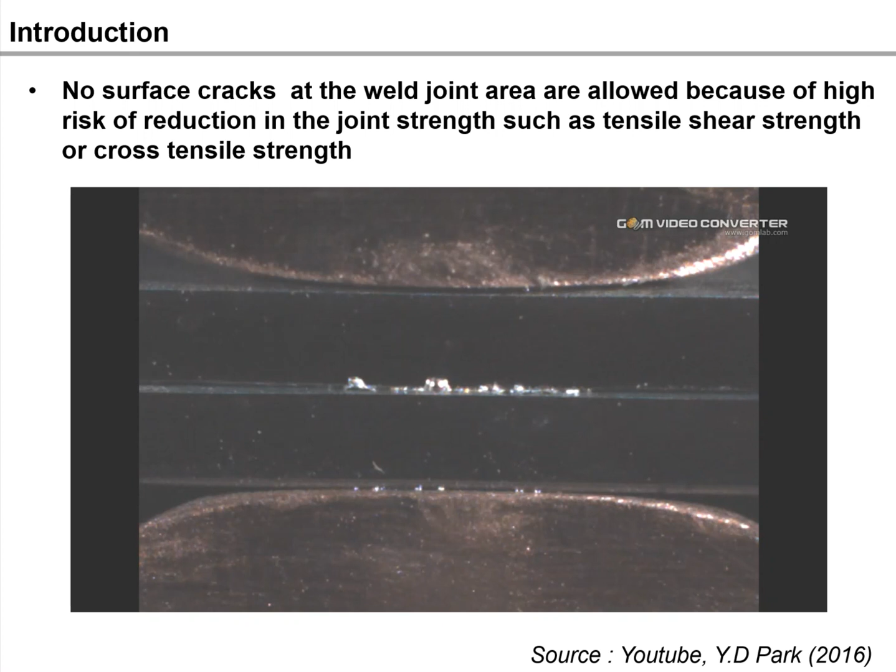My speech today addresses the understanding of LME cracks in resistance spot welding and proposed approaches for liquid metal embrittlement-free welds. No surface cracks at the weld joint area are allowed because of the high risk of reduction in joint strengths, such as tensile shear strength or cross-tensile strength.

Our research group was able to capture real-time LME cracks using high-speed video cameras in 2016. You can observe the continuous LME crack initiation and growth throughout the entire welding time and holding time.

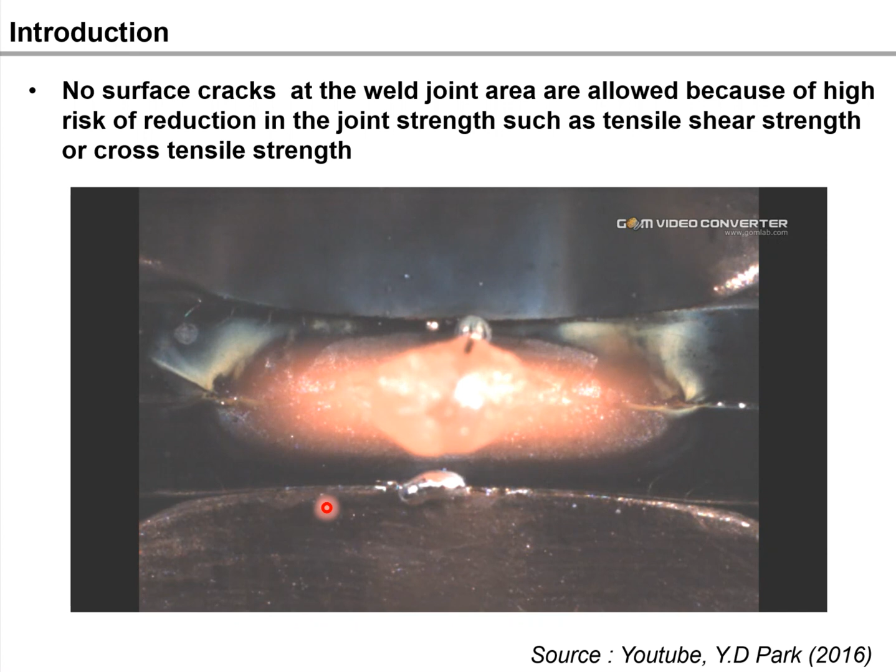Based on the observed LME cracks, the following three factors are the main prerequisites to form LME in steels: first, liquid zinc in contact with the steel; second, overcritical tensile stresses; and third, base metal microstructure. When these three conditions are met at the same time, the LME crack will occur.

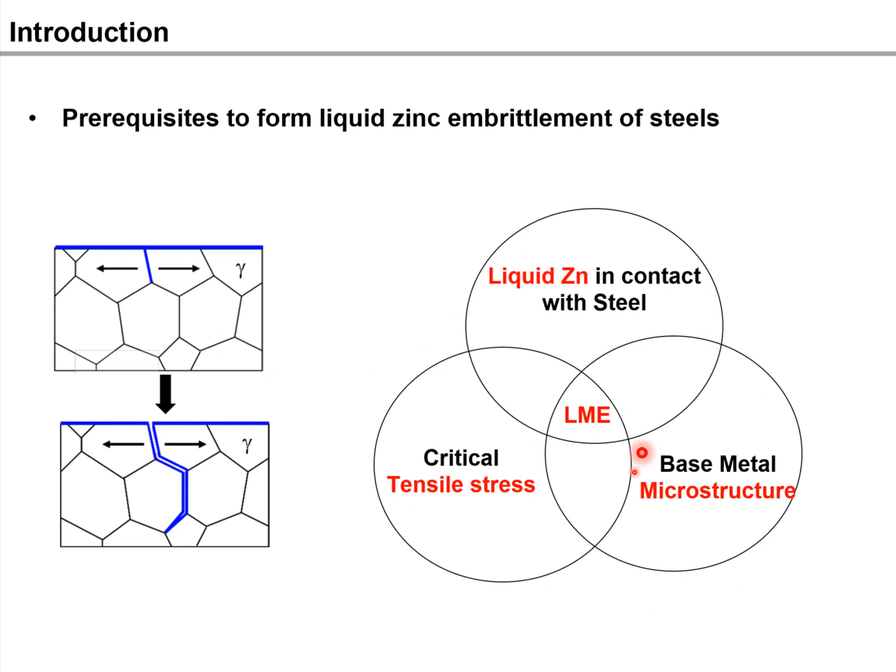Based on these prerequisites - liquid zinc, base metal microstructure, and tensile stresses - for a better understanding of liquid metal embrittlement cracks, I will explain the effect of zinc coating on LME cracks, secondly the effect of base metal microstructure on LME cracks, and lastly the effect of resistance spot welding process on LME cracks.

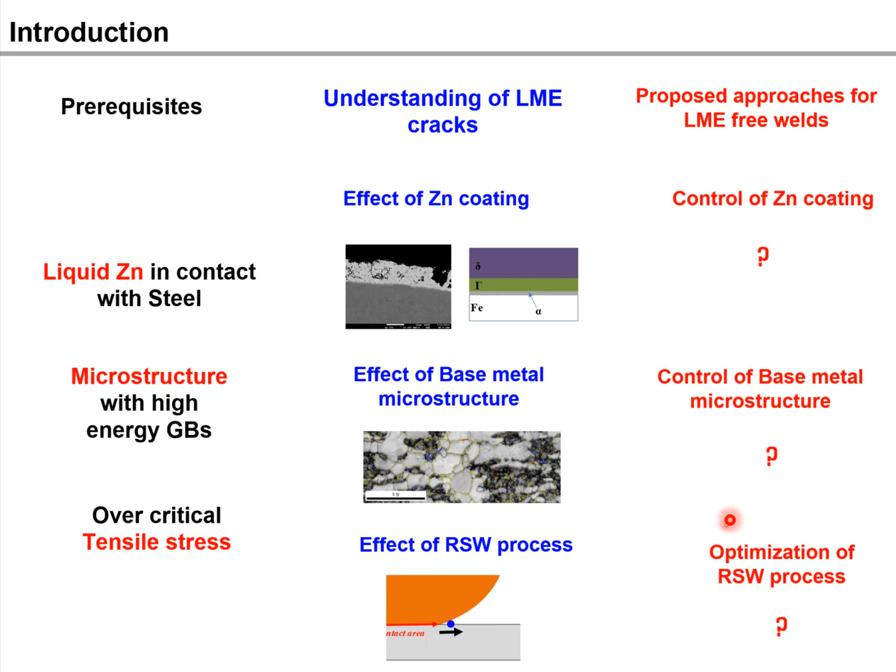After that, I will propose feasible approaches for LME-free welds: first, control of zinc coating; second, control of base metal microstructure; and lastly, optimization of resistance spot welding processes.

In part 1, let's make a deeper understanding of LME cracks. Firstly, the effect of zinc coating on LME cracks.

In 2015, we made an investigation for the effect of different coating types on LME cracks. We made resistance spot welds with increasing current, which results in increased nugget diameter. Then we compared the maximum LME crack lengths at the same nugget diameter. The result shows GI coating is most susceptible, then GA coating, and lastly EG coating.

Hong et al. also found that silicon in the steel delayed the dissolution of iron into the coating from the steel, which suppressed active formation of the alpha-Fe zinc layer. This could not prevent the steel from contacting liquid zinc during welding. So there is an underlying mechanism of the effect of zinc coating microstructure on LME crack occurrence.

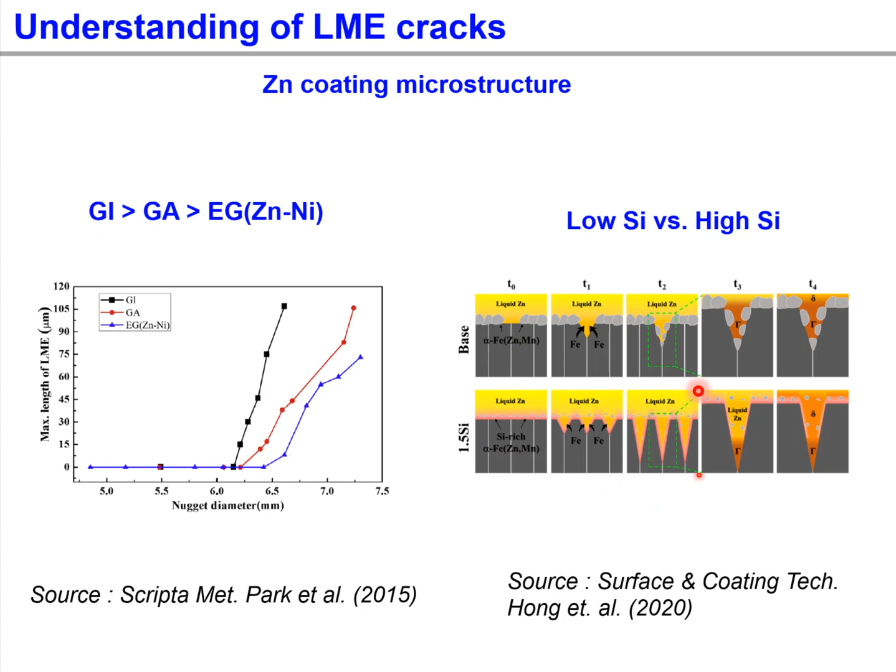To understand the underlying mechanism of zinc coating microstructure, Gleeble tests at different temperatures starting from 700 to 900 degrees Celsius with different holding times have been done to correlate zinc coating microstructure and LME behavior. The specific temperature and holding time combination shows more proneness to LME cracks than others.

The graph shows the stress and strain curve at testing temperature of 800 degrees Celsius. A large reduction in strain with the GA-coated sample compared to bare steel was observed due to LME. This reduction in strain due to LME is called the LME onset strain. The smaller the LME onset strain value, the more sensitive the material is to liquid metal embrittlement.

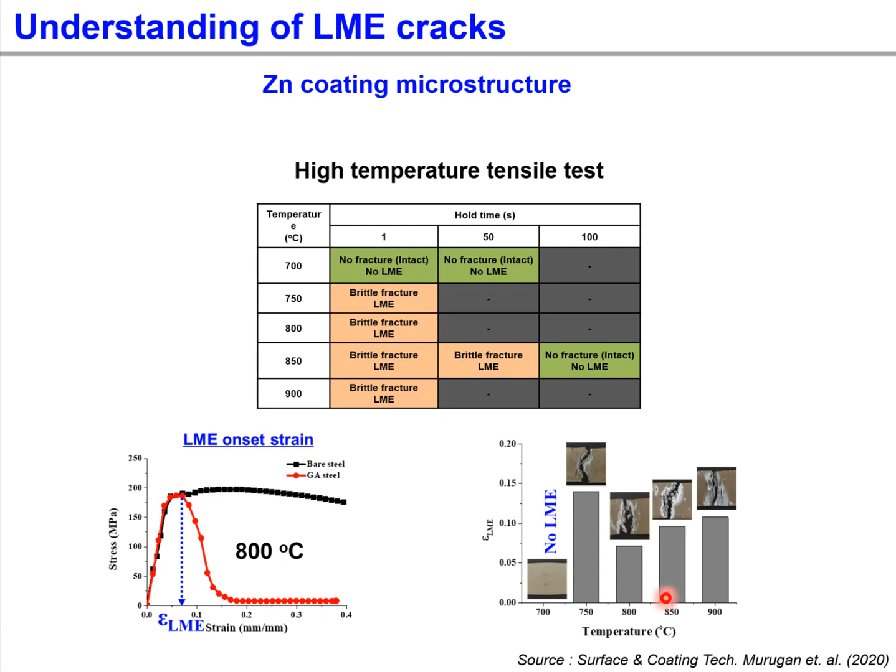We display the epsilon LME values at different testing temperatures. The largest reduction in strain was observed at 800 degrees Celsius, and a logical explanation is required for better understanding. We tried to explain the LME sensitivity with zinc coating microstructure analysis using SEM-BSE mode by analyzing

the ex-situ phase constituents such as delta, gamma, and alpha. We can predict the in-situ phase constituent and phase fraction at each testing temperature.

At testing temperature of 700 degrees Celsius, less than 3% of liquid zinc was available, so there was no LME cracking. However, with increasing testing temperature, a large increase in liquid zinc fraction was observed, and 58% of the phase was liquid zinc at testing temperature of 800 degrees Celsius.

When we make a relationship between the fraction of liquid zinc and the LME onset strain, increased LME sensitivity was found with larger fraction of liquid zinc. So the largest reduction in strain at 800 degrees Celsius can be explained by the high fraction of liquid zinc

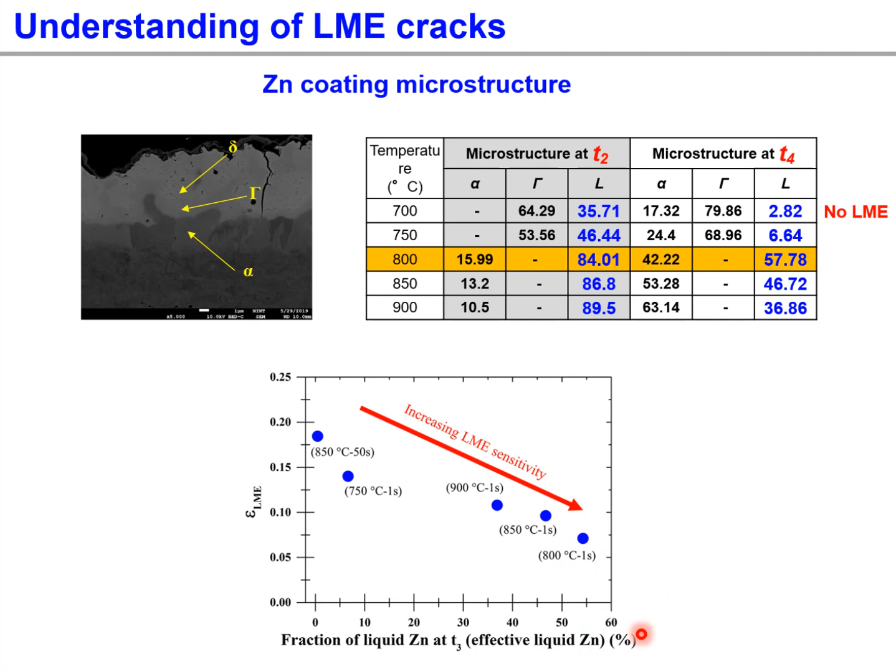for LME cracks. In more detail, at 700 degrees Celsius with a short hold time, only 3% of the liquid was available, but not in contact with the substrate, which resulted in no LME cracks. At 750 degrees Celsius, about 7% of liquid zinc was available from the entire coating layer, and it made contact to the substrate still through the alpha-Fe zinc layer, ending up with LME cracks.

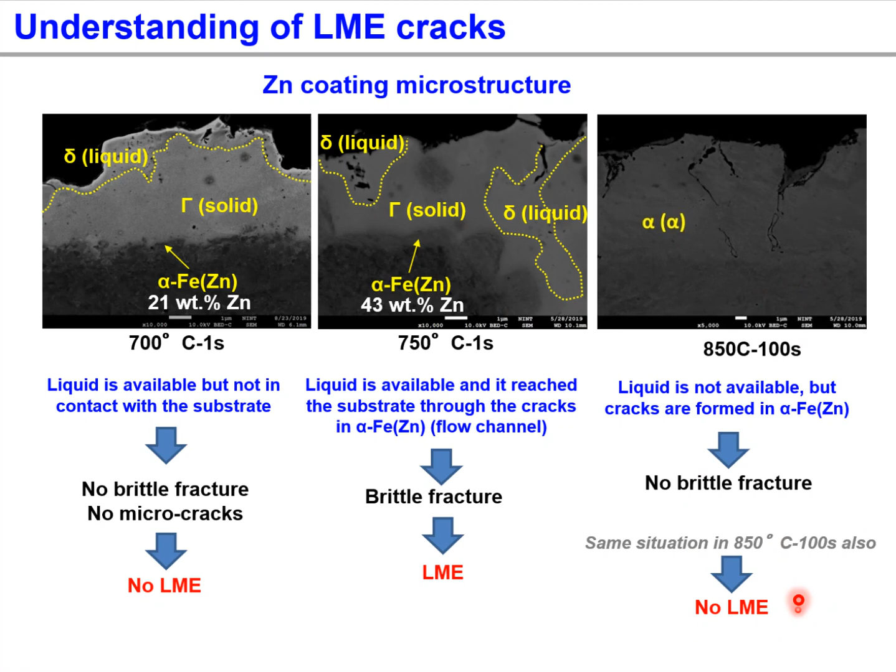However, at 850 degrees Celsius with a hold time of 100 seconds, a thick and continuous alpha-Fe layer was established with less or non-existent liquid zinc. Then there were no LME cracks. Overall, fraction of liquid zinc and continuous layer of alpha-Fe zinc are important factors for the LME cracking mechanism

in zinc coating. We can express this with a water tank analogy. Water level represents the fraction of liquid zinc, and the water tap represents the layer of alpha-Fe zinc, which serves as the flow channel.

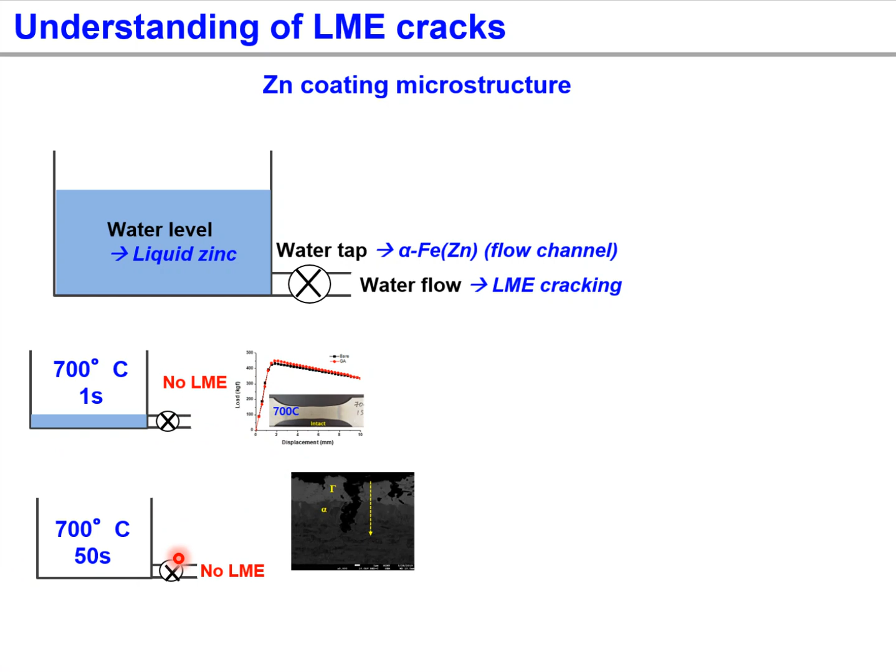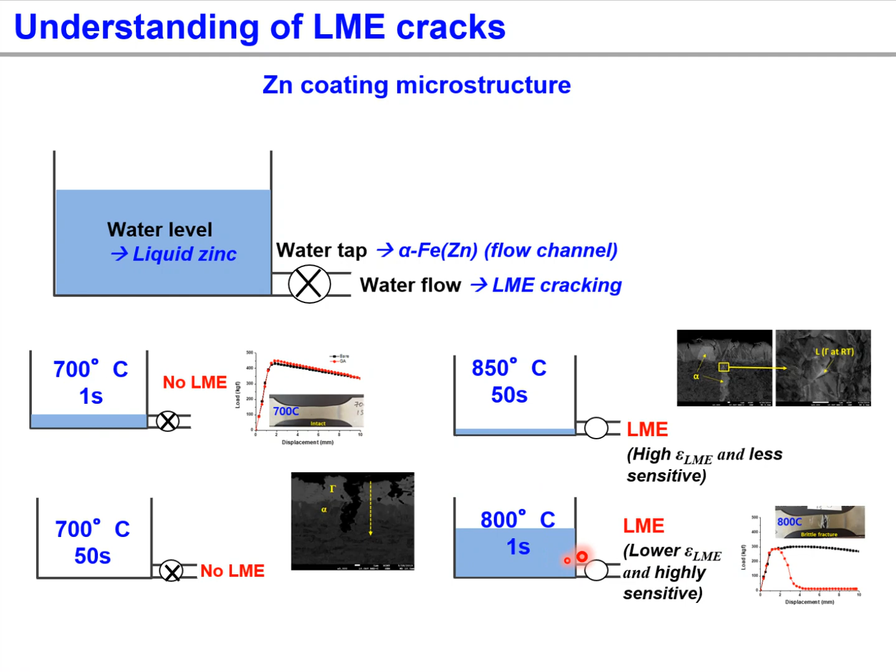At 700 degrees Celsius with 1 second hold time, due to the very low liquid zinc fraction and continuous alpha Fe layer, there is no LME cracks. Same for the 50-second hold time condition. However, at higher temperature of 850 degrees Celsius with the 50-second hold time, both conditions of liquid zinc and breakage of the alpha layer end up with LME cracks. Similarly, the 800 degrees Celsius, 1 second hold time condition provides a large fraction of liquid zinc and continuous alpha Fe zinc layer.

The following is a summary of the effect of zinc coating on LME cracks. The LME sensitivity is governed by the fraction of effective liquid zinc. LME is influenced by the breakage of the alpha Fe zinc layer, which allows direct contact of the liquid zinc with the substrate steel. High silicon in the steel delays the dissolution of iron into the zinc coating, which suspends the formation of the alpha Fe zinc layer, making it more susceptible to LME cracks. So the fraction of liquid zinc and the alpha Fe zinc layer are the key factors from the zinc coating side.

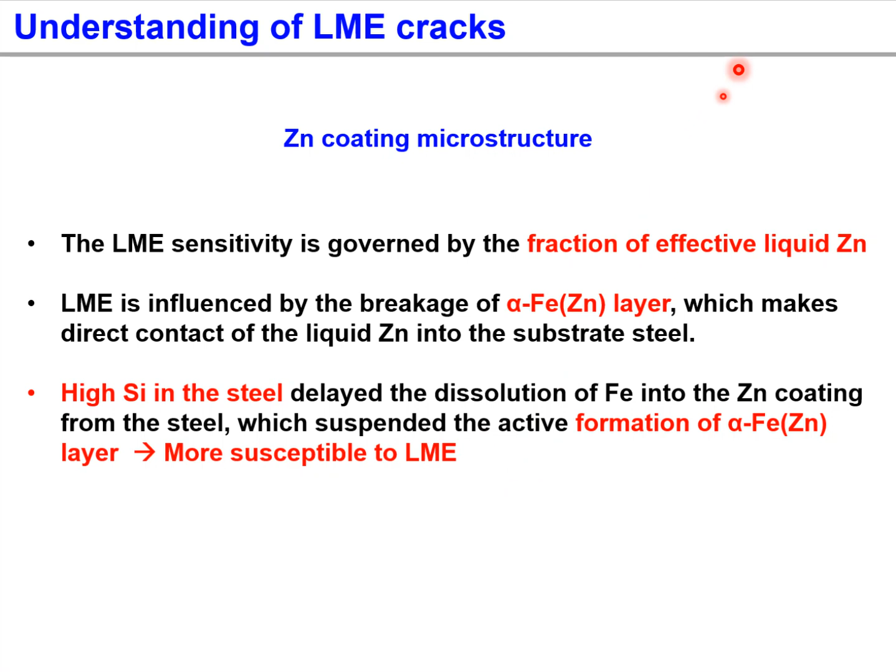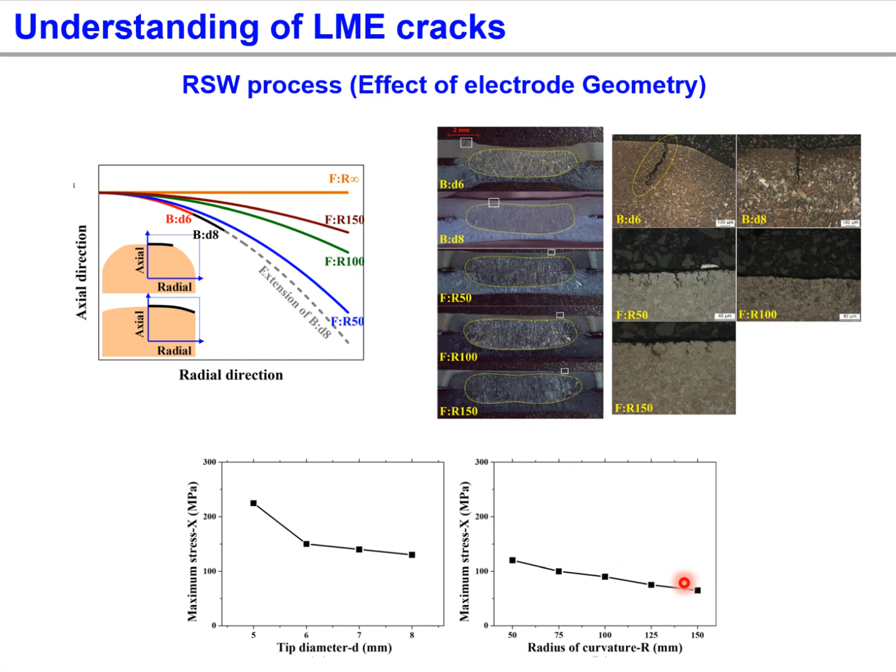Secondly, the effect of resistance spot welding process on LME cracking. As part of the welding process, electrode geometry is well known as a key factor for LME cracks. The results suggest that the radius of the electrode is the most critical design parameter controlling the critical stress for LME cracking. Moreover, larger tip diameter and higher radius of curvature result in lower maximum stress levels, leading to lower LME sensitivity. This is attributed to the fact that the radius-type electrode provides the benefit of increasing both the radius and the electrode tip diameter.

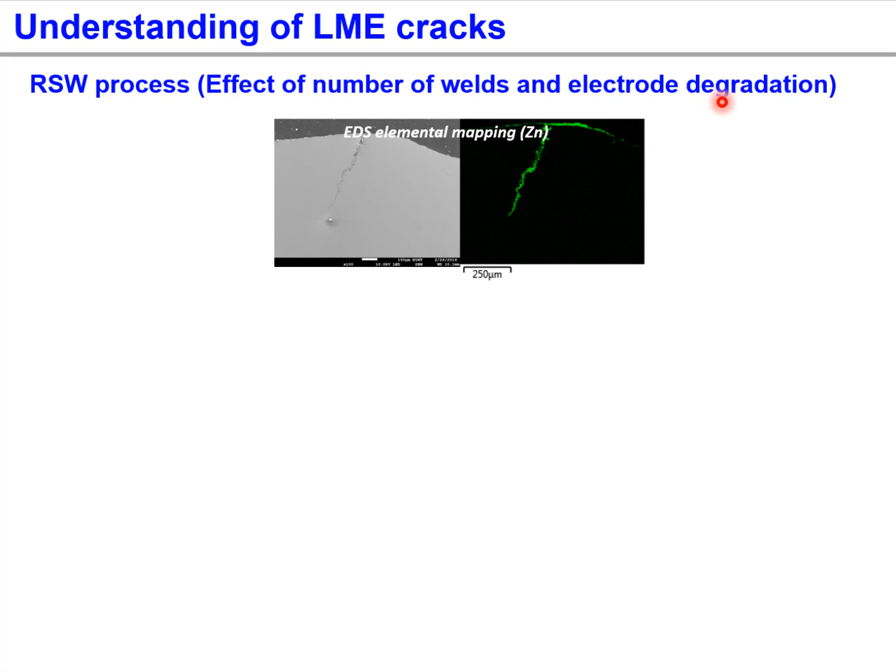We also investigated the effect of number of welds and electrode degradation on LME cracking. When the first weld was made with a high current level, it resulted in large LME cracking. With an increase in weld number, there was a dramatic reduction in total crack length and maximum crack length up to around 160 welds, and further welds showed relatively low levels of LME cracks.

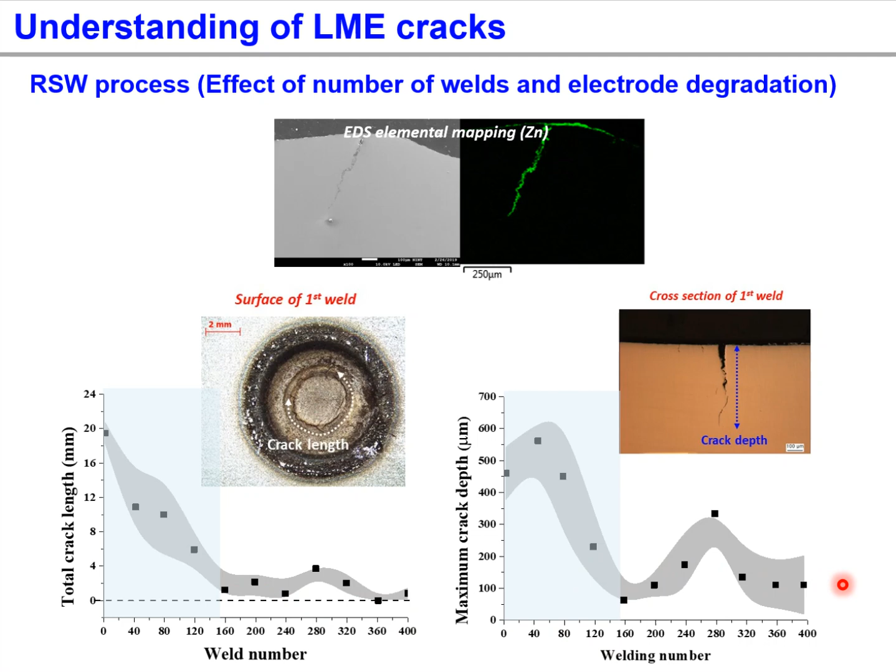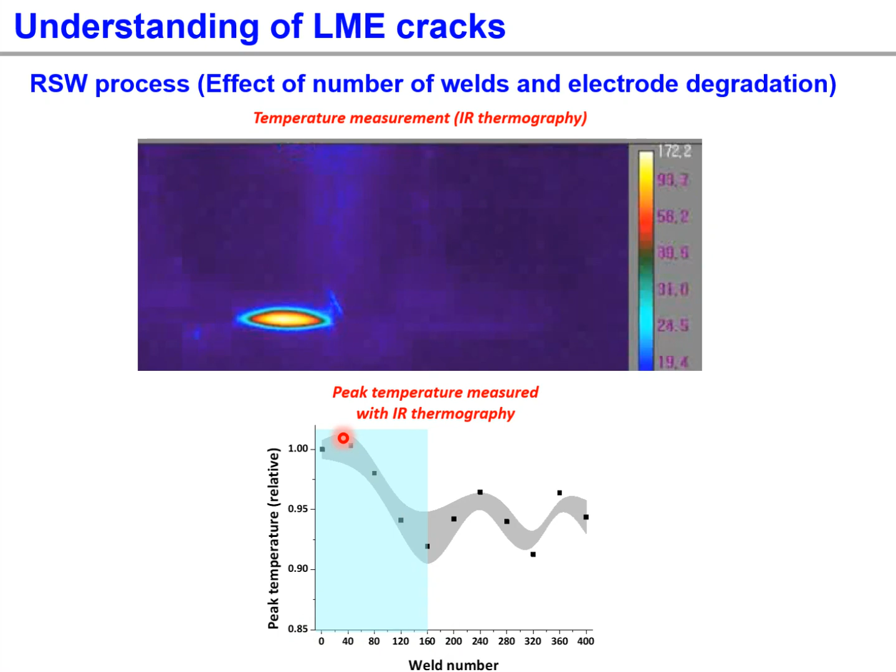Since surface temperature is known to be directly related to LME cracking behavior, peak temperature was measured with IR thermography and recorded at each weld. The surface peak temperature also shows a large drop until 160 welds and remains at a low level until 400 welds.

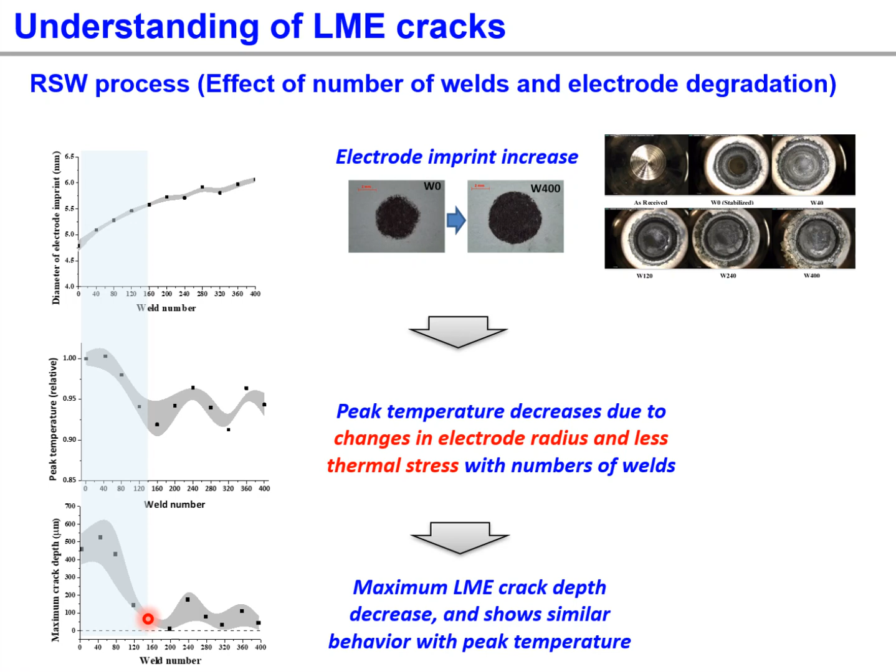With increasing number of welds, the diameter of electrode imprints increases, due to changes in the geometry of the electrode surface. Also, surface peak temperature decreases dramatically up to 160 welds due to changes in electrode radius and less thermal stress with the number of welds. Finally, the decrease in maximum LME crack depth up to 160 welds can be well explained in conjunction with the similar behavior of the peak temperature. So the geometrical factor with increased contact area is a more dominant factor for lower LME sensitivity than the metallurgical factor associated with number of welds.

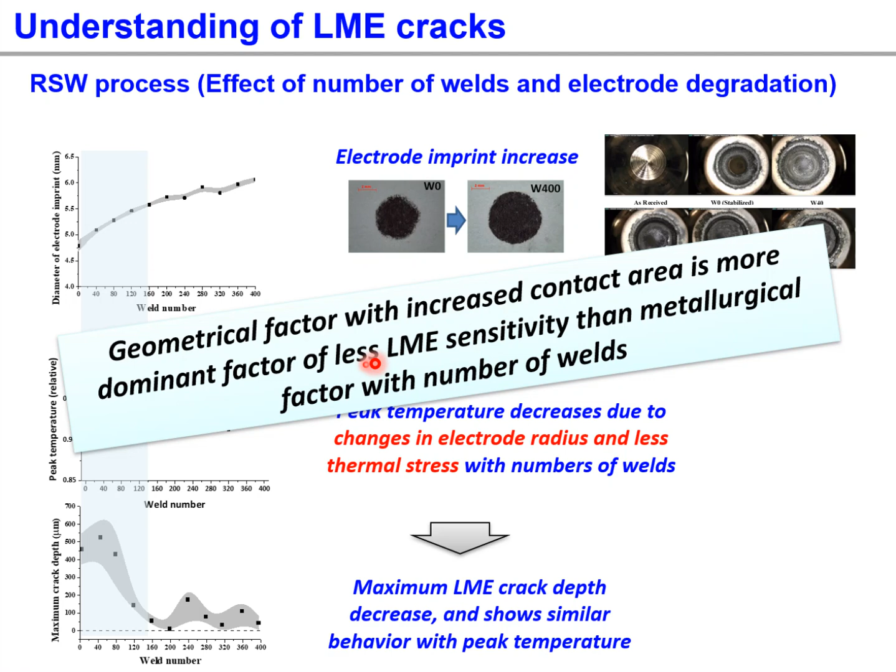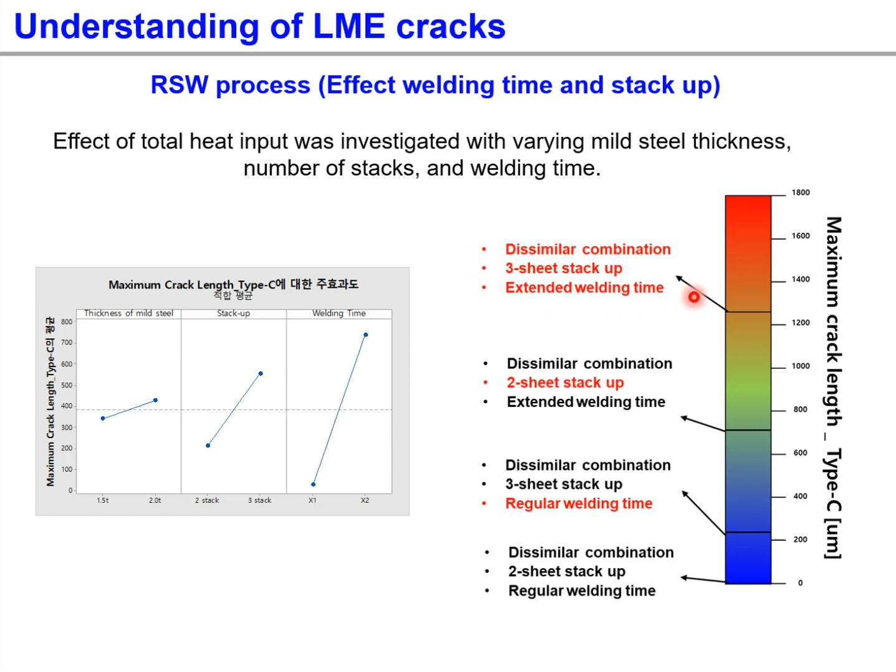The effect of total heat input was investigated with varying mild sheet steel thickness, number of stacks, and extended welding time. Thicker mild sheet and increased number of stacks increase the level of maximum crack length. However, extended welding time provides the largest effect on LME crack severity. Therefore, the combination of three-sheet stack up with extended welding time showed the most severe LME cracks.

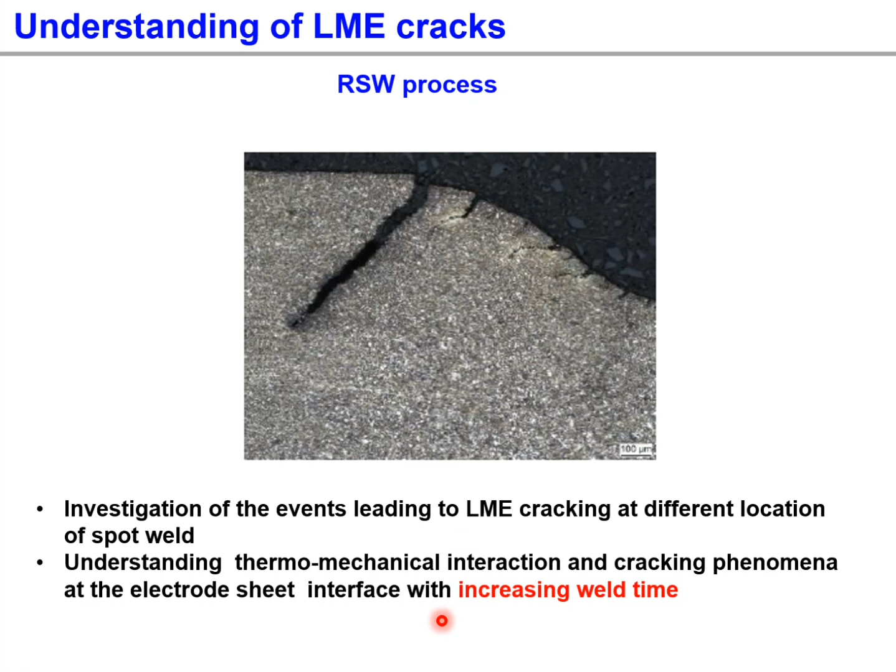To extend the knowledge of LME cracking mechanism, further studies were carried out on the reasons of LME cracks at different locations of spot welds, and the differences in LME crack lengths with location. The study was done with systematic increase in welding time to understand the thermomechanical interaction for LME cracks.

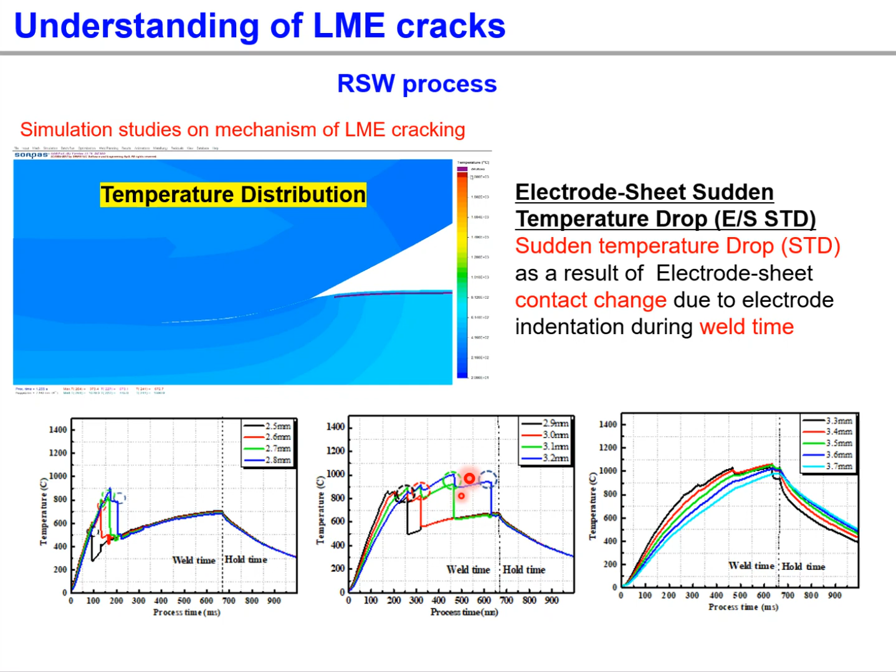When the welding current starts to flow, the temperature of the entire weldment increases. However, the electrode and sheet surface start to make new contact, which ends up with a sudden temperature drop at the new contact surface, since the electrode is cooled by the coolant. Several physical electrode-sheet contacts have been observed at different locations, with sudden temperature drops occurring at different locations and different times during the welding process.

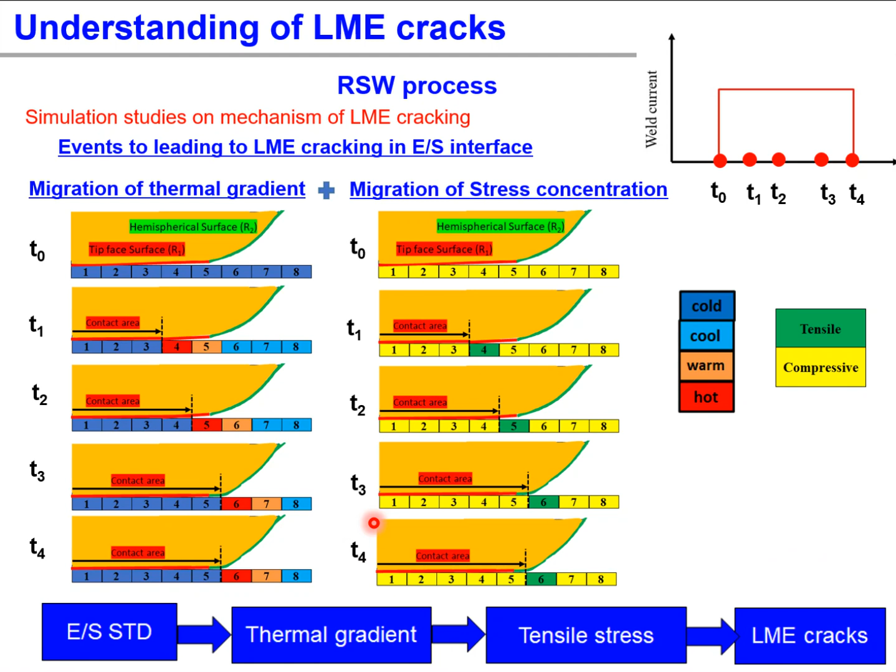By performing simulations with welding times T0, T1, T2, T3, and T4, new contact between electrode and sheet surface established the sudden temperature drop, which satisfied the thermal gradient for tensile stresses. So at each welding time step, this established the thermal gradient and tensile stresses. With increase in welding time, these four steps — electrode-to-sheet contact, sudden temperature drop, thermal gradient, then tensile stresses — and LME cracks occur toward the outer boundaries.

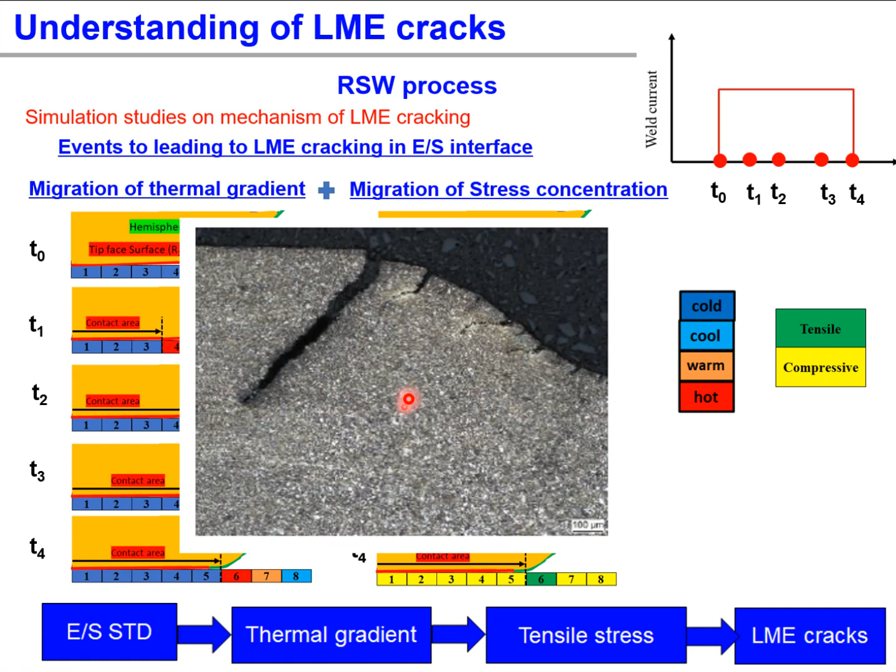These four steps of the LME cracking mechanism well explain the LME cracks in different locations. However, there is a question of why different crack lengths are observed in different regions of the electrode-to-sheet interfaces. To answer this question, we need to observe the stress distribution in conjunction with the transition of electrode radius from R1 to R2. Within the R1 face magnitude, the duration of the tensile stress is relatively short.

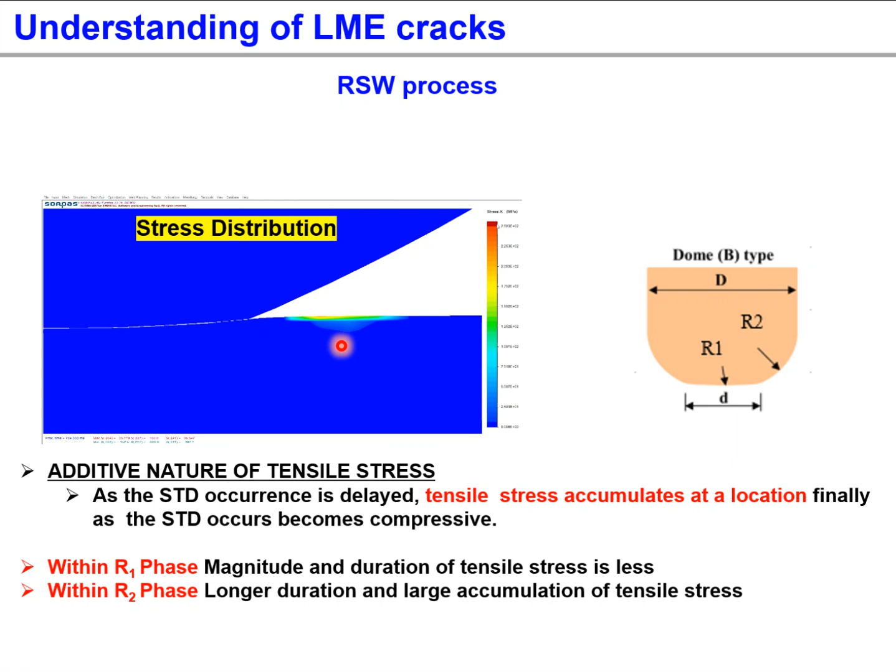However, when R2 phase contact has been made, the duration of the tensile stresses becomes very long, and large accumulation of tensile stresses could be possible.

Based on the simulation data, we measured the duration time of thermal gradient and tensile stresses at the R1 radius zone and R2 radius zone respectively. At the R1 transient zone of the electrode, the tensile stresses and thermal gradient exist for a shorter time. In the R2 transient zone, the duration of thermal gradient and tensile stress is relatively longer. So the duration of tensile stress and thermal gradient would correlate to the differences in crack length with location.

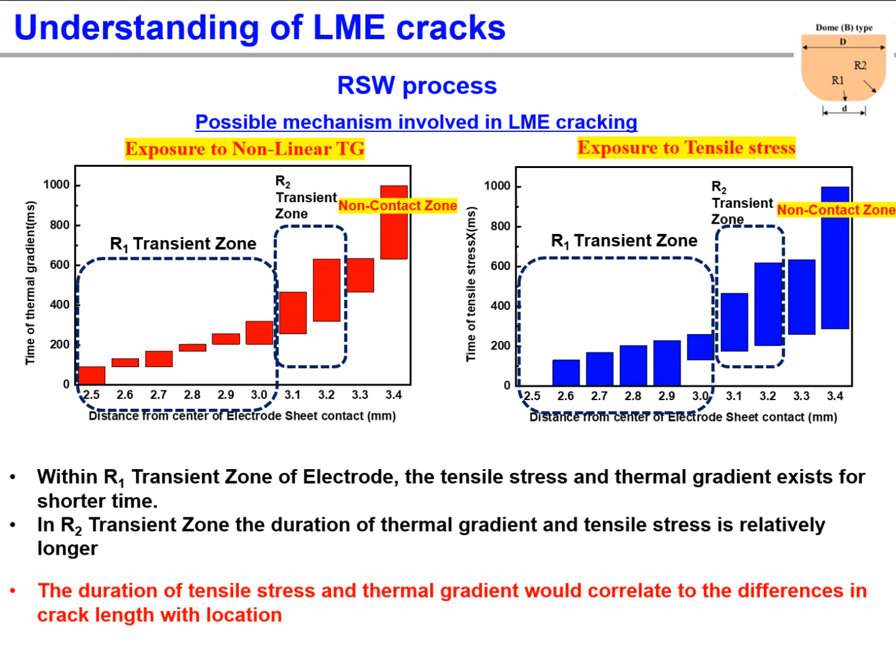To summarize the effect of resistance spot welding processes on LME cracks: heat input has a direct relation to LME cracking behavior. Sudden temperature drop as a result of electrode-to-sheet contact establishes the thermal gradient and tensile stresses for liquid metal embrittlement cracking.

As the radius changes from R1 to R2 in a dome-type electrode, the sudden temperature drop occurrence has been delayed, so that the tensile stresses accumulate at the location and finally develop into large LME cracks on the shoulder region.

Overall, the geometry of the electrode, welding current, welding time, and electrode force influence the thermal gradient and tensile stresses on the electrode sheet surface. Therefore, the welding parameters have a strong relationship to the location and size of LME cracks.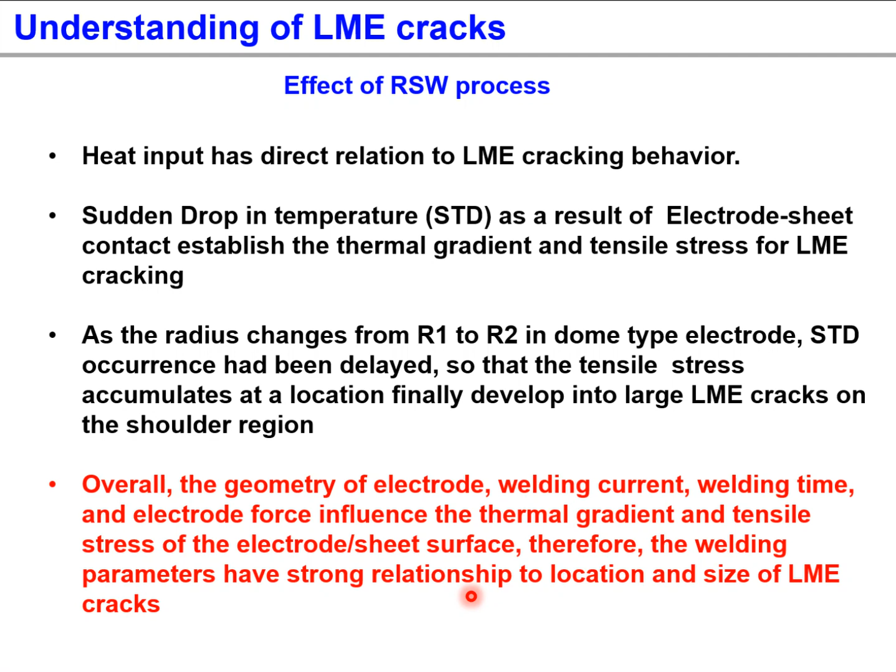Finally, the effect of base metal microstructure on LME cracks. In 2018, one review paper summarized the LME sensitivity with different steel grades, which gives the potential possibility of a relationship between base metal microstructure and LME cracks.

This year, Razmpoosh et al. reported that liquid metal penetration only occurs in random high-angle grain boundaries, where its propagation path is a function of misorientation angle and stress component perpendicular to the grain boundary plane. In contrast, low sigma coincident site lattice boundaries such as sigma 3 and sigma 5 to 9 resist LME cracks, even at the maximum stress component.

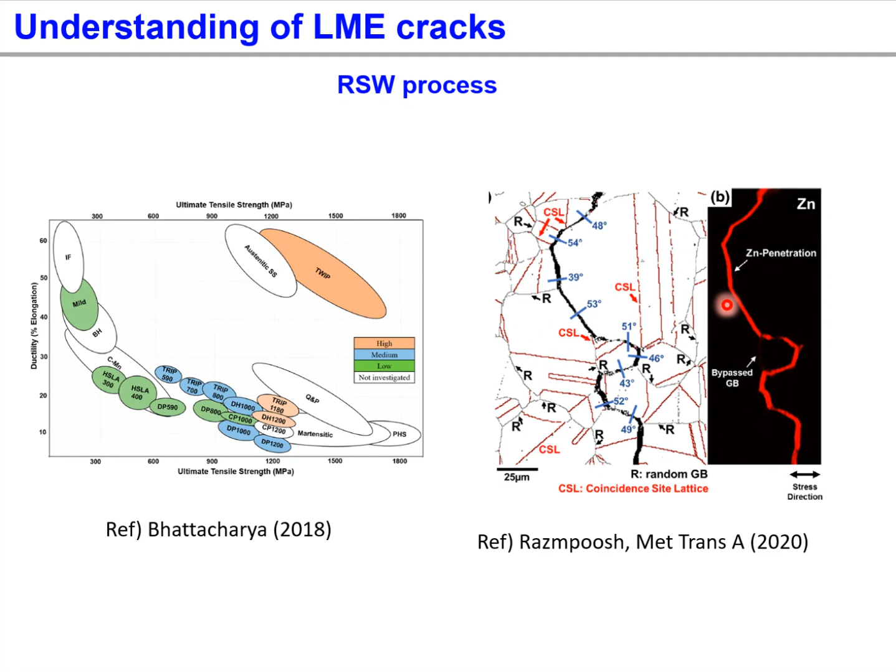Our research group also found that there is a large difference in LME crack sensitivity between medium manganese steel and DP steels, even with extended welding time.

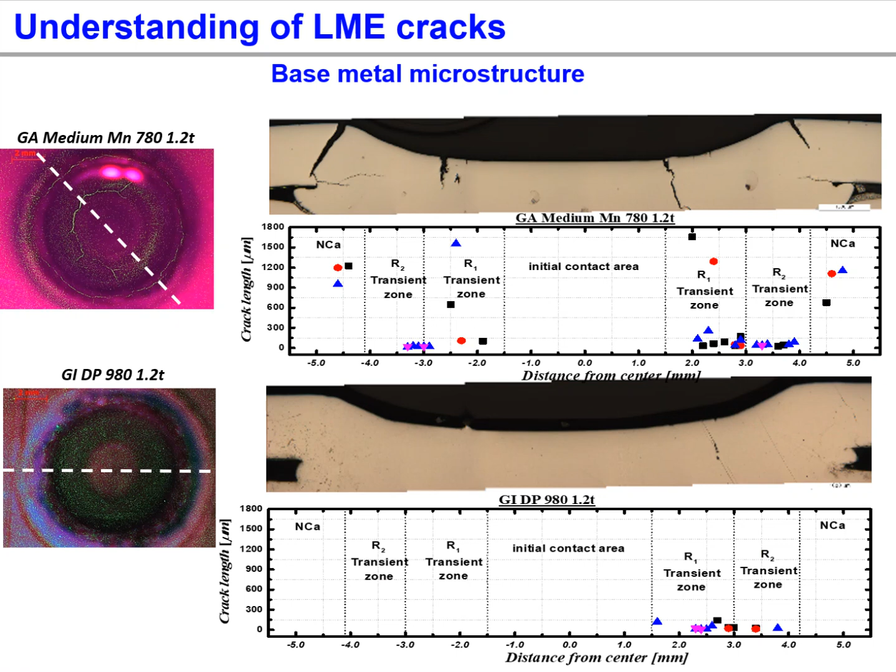In case of medium manganese steel, a large shoulder crack has been observed with extended welding time. In case of DP steels, no large shoulder crack was found even in extended welding time conditions.

Now, from here, Part 2: proposed approaches for liquid metal embrittlement free welds. I will try to explain this in three ways.

First, control of zinc coating microstructures. Secondly, control of base metal microstructures. And finally, optimization of resistance spot welding processes.

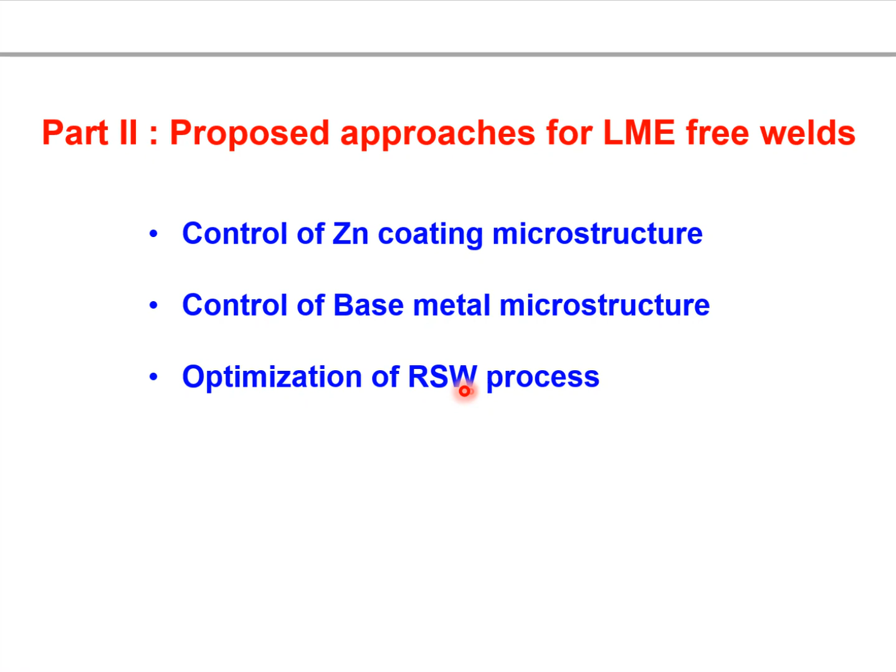First, proposed approaches for LME-free welds: control the zinc coating microstructure. Let's control the fraction of liquid zinc and the alpha Fe zinc layer. Formation of a continuous alpha Fe zinc layer is important for the suppression of LME cracks. Minimize the liquid zinc fraction to avoid direct contact to the substrate. Optimization of initial zinc coating microstructure with coating alloy design, such as low silicon, and annealing parameters.

Here I have a full combination of the liquid zinc and alpha Fe zinc layer. First case: no liquid metal embrittlement due to no liquid zinc being available. In the second and third cases, with available liquid zinc, a non-uniform alpha Fe zinc layer will open up the channel for direct contact of liquid zinc to the steel substrate. When a uniform continuous alpha Fe zinc layer forms at the interface, it suppresses the LME cracking.

Also, the fragmentation of the alpha Fe zinc layer due to external tensile stress can also induce the propagation of LME cracks.

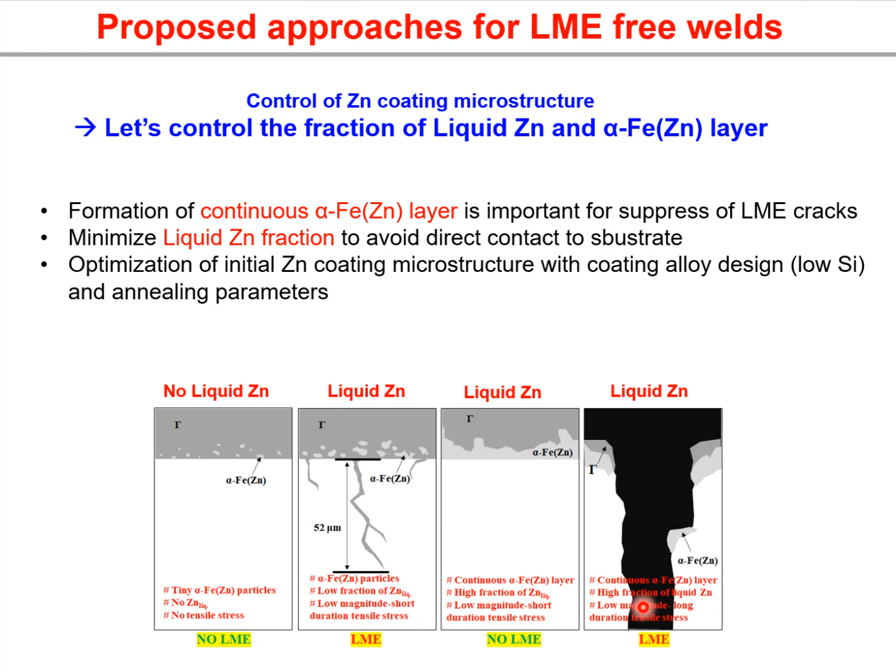Second proposed approach for LME-free welds: control of base metal microstructure. Let's control the grain boundary energy. In austenitic steel, grain boundary engineering approach can be a feasible method to reduce LME cracks. As Razmpoosh et al. proposed this year, by suppressing a lot of random high-angle boundaries and applying grain boundary engineering technology, we can consist of a lot of special CSL boundaries, which ends up with the suppression of LME cracks.

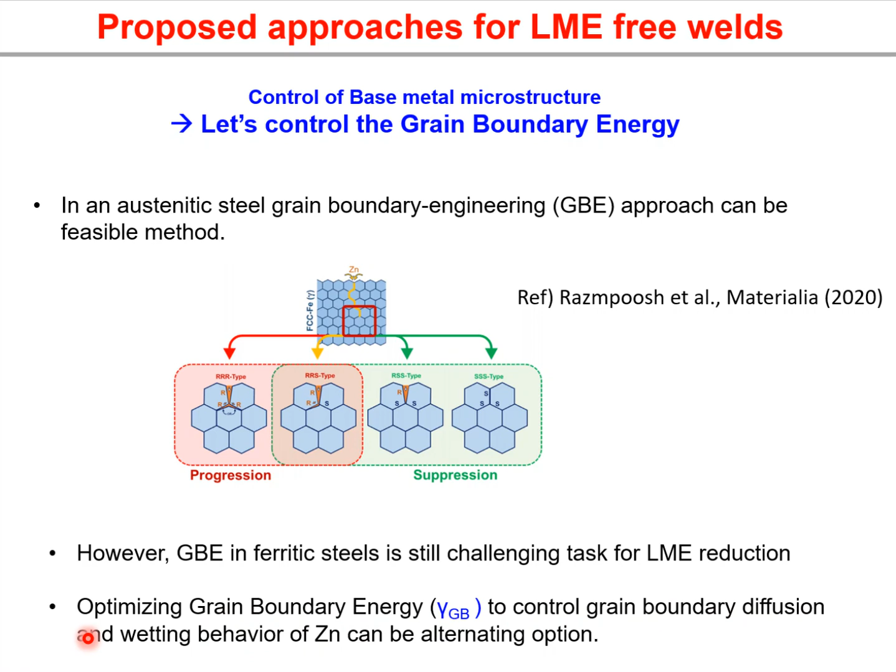However, grain boundary engineering in ferritic steels is still a challenging task for LME reduction. So optimizing grain boundary energy to control the grain boundary diffusion and wetting behavior of zinc can be an alternating option.

Finally, proposed approaches for LME-free welds: optimization of resistance spot welding process. Let's control the critical stress buildup during the resistance spot welding. Controlling the tensile stress buildup using optimization of process parameters such as welding current, time, and electrode force can be possible.

Heat input dependent hold time adoption, which is proposed by Hohne et al. this year, should be used to avoid LME cracks during spot welding. The optimization of electrode geometry can mitigate the stress buildup over the critical limit.

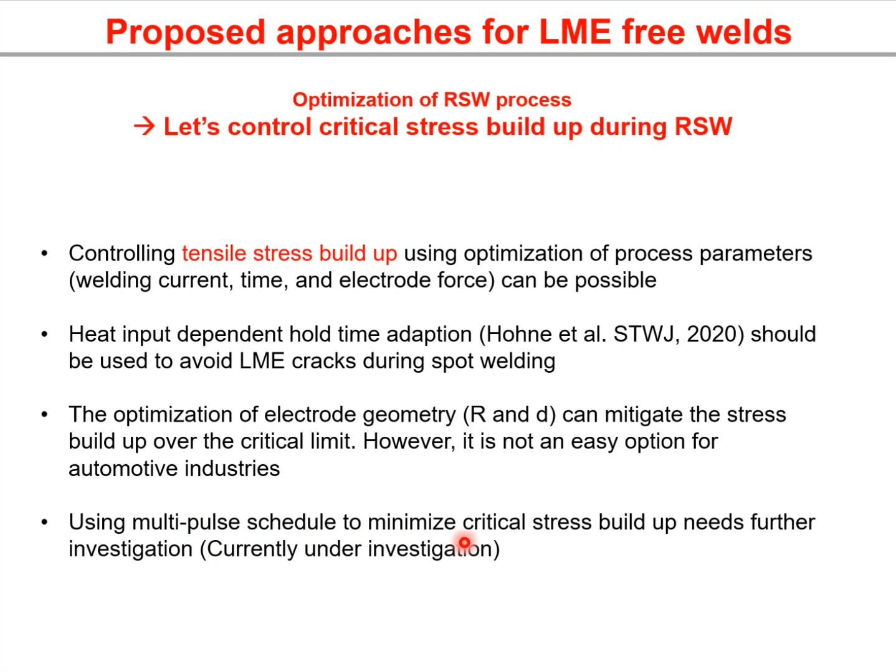However, it is not an easy option for the automotive industry to adopt. Using multi-pulse schedules to minimize the critical stress buildup needs further investigation.

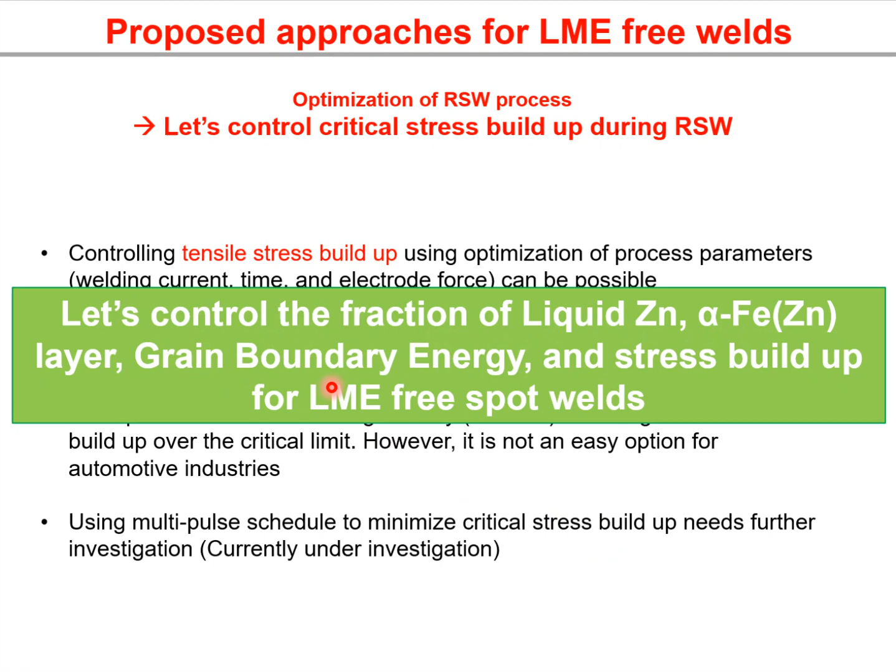Let's control the fraction of liquid zinc, alpha Fe zinc layer, grain boundary energy, and stress buildup for LME-free spot welds.